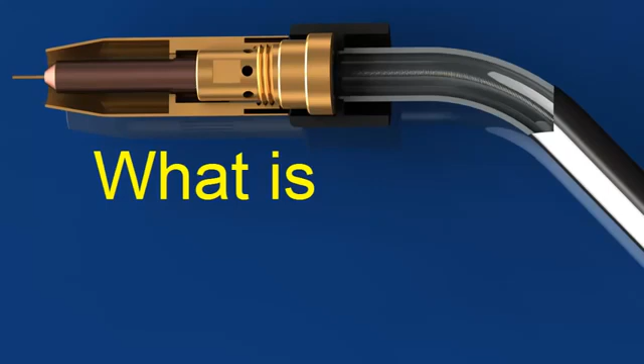What is MIG welding? MIG stands for Metal Inert Gas Welding. The American Welding Society calls this process gas metal arc welding, or GMAW. You might also hear it called wire welding. In MIG welding, a thin wire acts as the electrode.

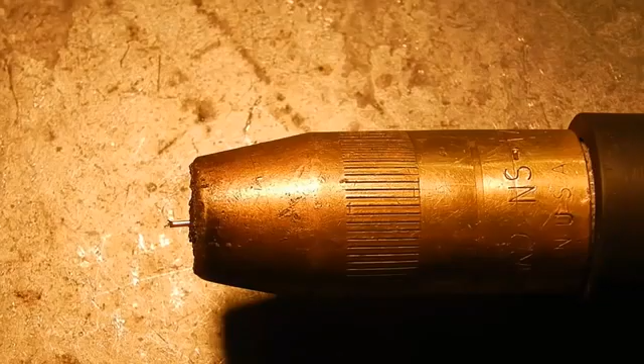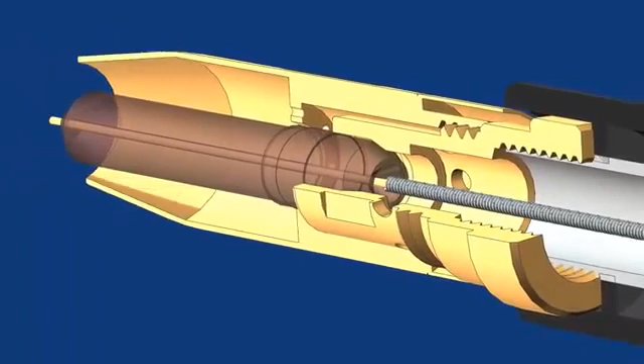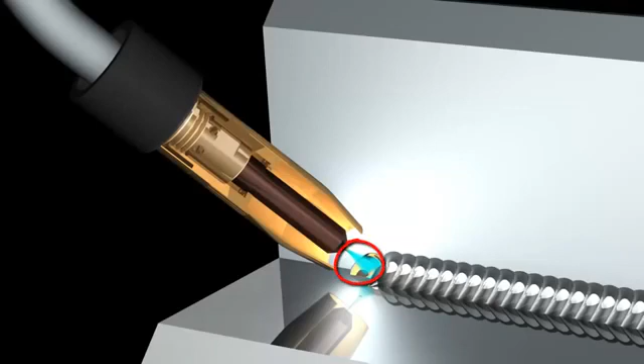This wire is fed from a spool mounted on a gun or inside the welding machine, through a flexible tube and out of the nozzle on the welding gun or torch. The wire is fed continuously when the trigger on the welding gun is pulled. When this trigger is pulled, it also switches on the welding current and a shielding gas. An electric arc forms between this wire electrode and the workpiece and heats both metals above their melting point. These metals mix together, or coalesce, and solidify to join the workpieces into a single piece.

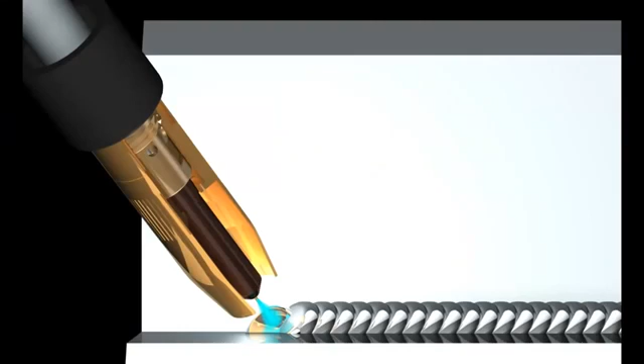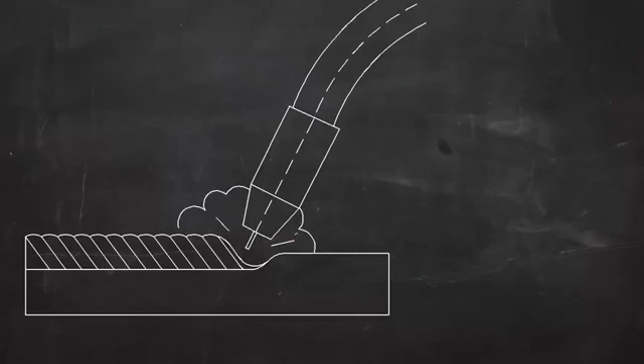The metal in the parts to be joined is called the base metal, and the metal that comes from the melting wire electrode is called filler metal. MIG welding always adds filler metal to the joint. Because the wire electrode melts as it's being used, MIG is called a consumable electrode process.

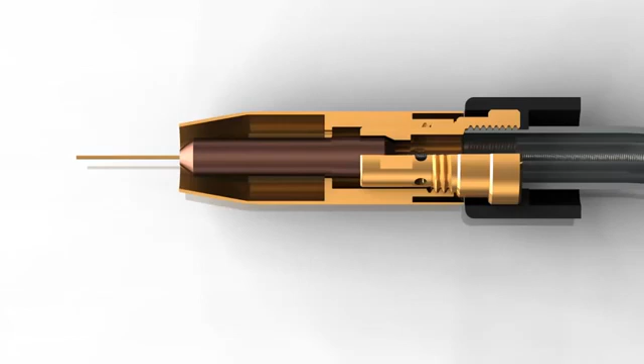Here's the MIG wire going through the wire feeder into a flexible tube or conduit liner. The liner goes through the hose or welding lead all the way to the torch nozzle. At the nozzle, the wire is fed through a contact tip and comes out at the point of the weld.

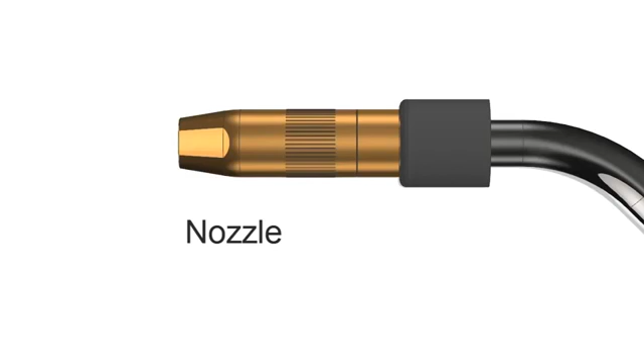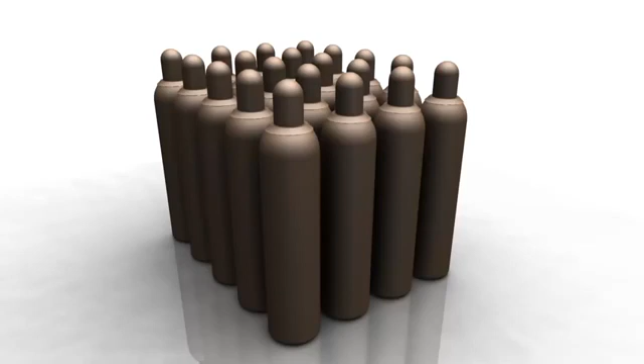Shielding gas is also fed through the welding lead. It goes through a gas diffuser and flows out of the nozzle. This shielding gas, which is often a mix of argon and CO2, protects the molten metal from reacting with oxygen, water vapor, and other things in the atmosphere. The shielding gas is stored in high-pressure cylinders like these. The pressure is reduced to a usable level by a device called a regulator.

In MIG welding, all the machine controls are set on the machine itself. The most important of these are polarity, wire speed, and voltage. The trigger on the gun is just an on-off switch.

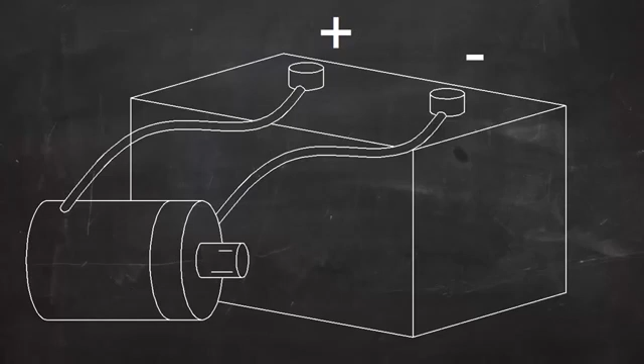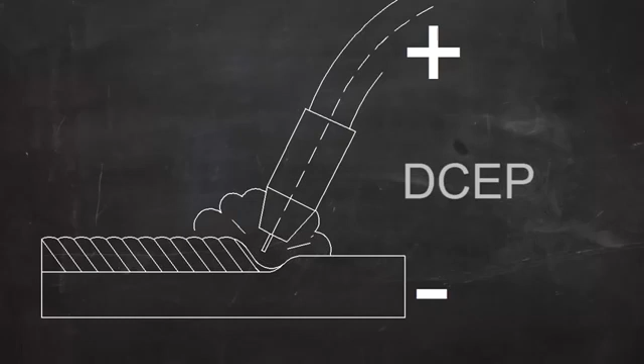For most MIG welding, the current is direct current, or DC. DC is like the current flowing from a car battery. One wire is always negative, and one is always positive. In DC MIG welding, the electrode is usually positive and the workpiece is negative. The term DCEP is used, indicating that the current is direct current and the electrode is positive. This is also called reverse polarity, but DCEP is a more descriptive term.

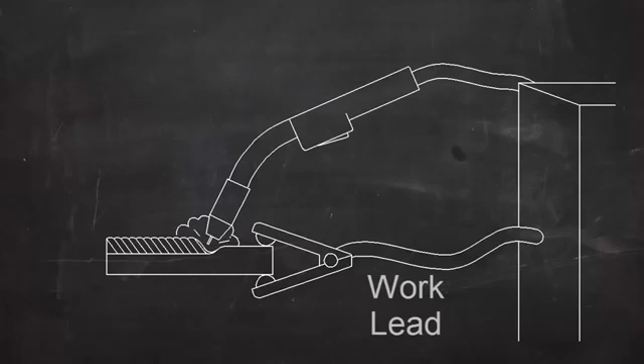In an electric circuit, the current flows in a loop. In MIG welding, the current has to flow in a complete circle from the machine to the torch, into the work, and back to the machine. A work lead is clamped to the work to complete the circuit from the workpiece back to the machine.

So, in summary, MIG welding is an electric arc welding process. It uses a consumable wire electrode. Filler metal is added automatically, and the shielding gas comes from a high-pressure cylinder.